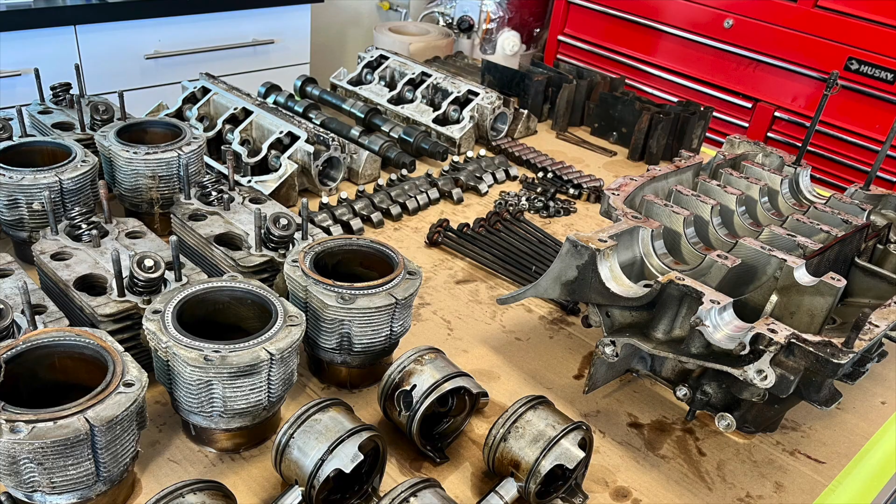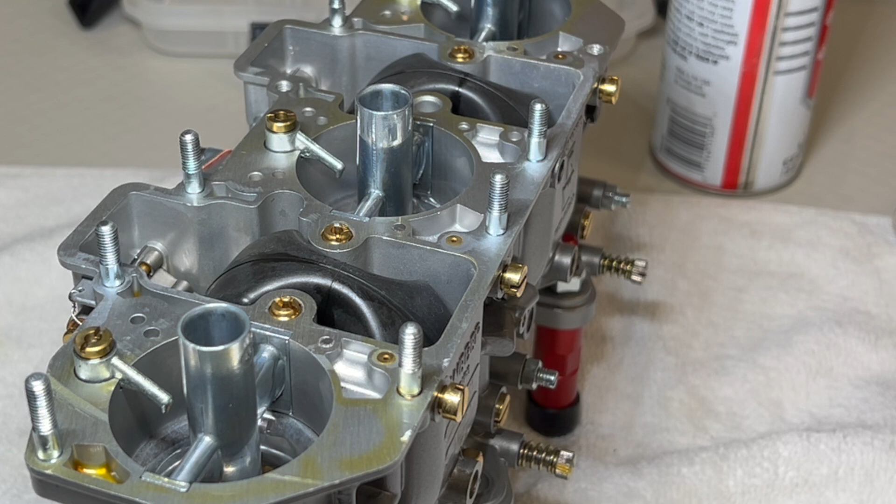So I rebuilt these carburetors and we put them on the car back in May. It's now the 1st of December, and last week I just couldn't get the car started. I cranked this thing for over an hour, trying different things with fuel adjustments and timing. I thought, what the heck is wrong with this thing, because the last time I drove it, it ran fine. I shut it off and didn't get a chance to drive the car for literally about 4 weeks.

I know you can have some evaporation problems with the fuel in the float bowls, which could be an issue, so I thought maybe that was it. Anyhow, no fuel delivery problems, no fuel pressure problems. Just couldn't get the car started.

Eventually I did, fouling the plugs along the way because it had been sitting so long, just cranking it and giving it gas, trying to get things started. But we got it running and it just ran terrible. I couldn't even get it out of second gear. It would idle, I could get it up to maybe 1,500 RPMs. After that it would just start bucking and carrying on, and I tried everything. I couldn't get it to work.

So I thought, well, maybe there's some blockage in the passageways. Maybe our air correctors here are blocked. I mean, it could be anything. But it definitely merits taking the carburetors off and having a look.

So here's what I found. These floats here were switched out. I had originally the brass floats in there, and they're probably very good, depending on the source of where you get them. These I ordered from Italy, thinking, well, they're going to be a lot better coming directly from those guys rather than who knows where they're manufactured. But anyhow, here's what I got.

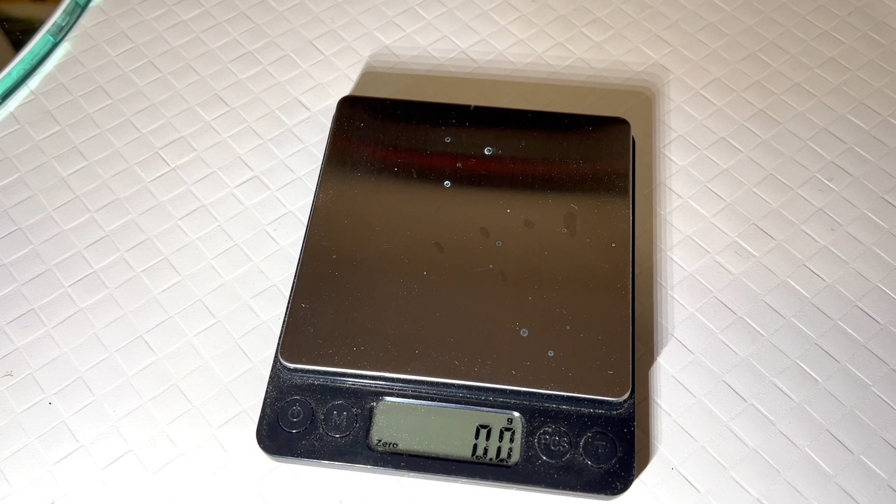Okay, so I pulled the most offensive float out first while it was still soaked in gasoline. We'll just do a comparison here between an original float, 25.3, and this one here just feels heavier.

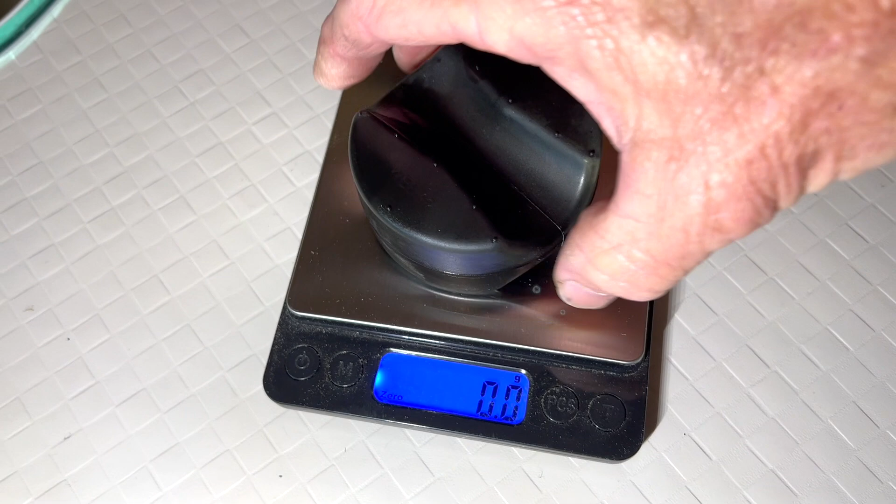But this thing's so fat and absorbed with fuel, it's actually way heavier. So that's going to throw things off considerably by itself, even if it wasn't frozen.

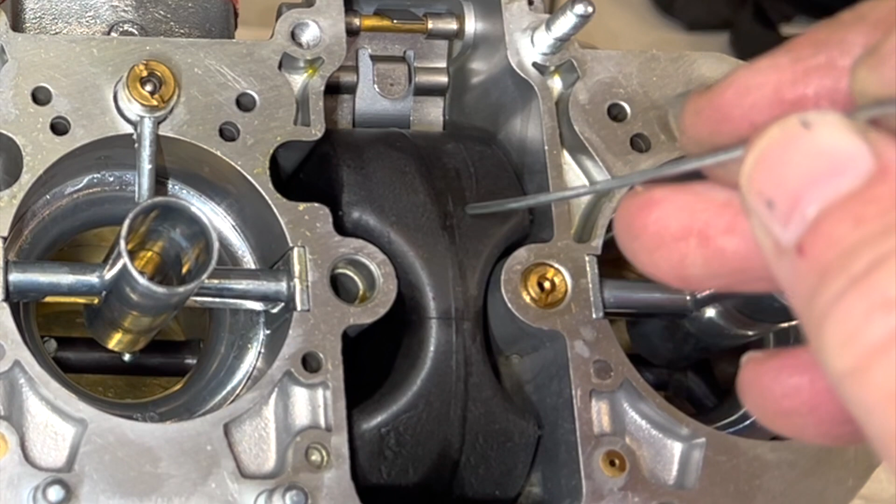And one other quick comparison I want to show you between the two styles. This one, I just don't remember it being this thick when I put them in. I looked at it when I pulled the top off and thought, wow, that doesn't even look like the same floats I put in there. But I just slid back in a brass float, and you can see how much clearance we have. This is fully bottomed out around this area here and here, and in the front as it's sitting on the bottom.

Got quite a shim stack there, going all the way down. This one here, sitting on the bottom, we're already resting up against the housing here, which is not good. I'm actually touching the body, so these aren't going to go down very far at all. That's it, that's all the farther down those go.

But there is the difference after a few months sitting in fuel. Same thing found in our second carburetor. I've got this one pulled apart, gone through, and readjusted everything, put back together, and ready to move on.

Our pile of floats over here all weigh in at about 26.8 to 9 grams, splitting on the pivot points here. Way too thick and definitely not going to work out.

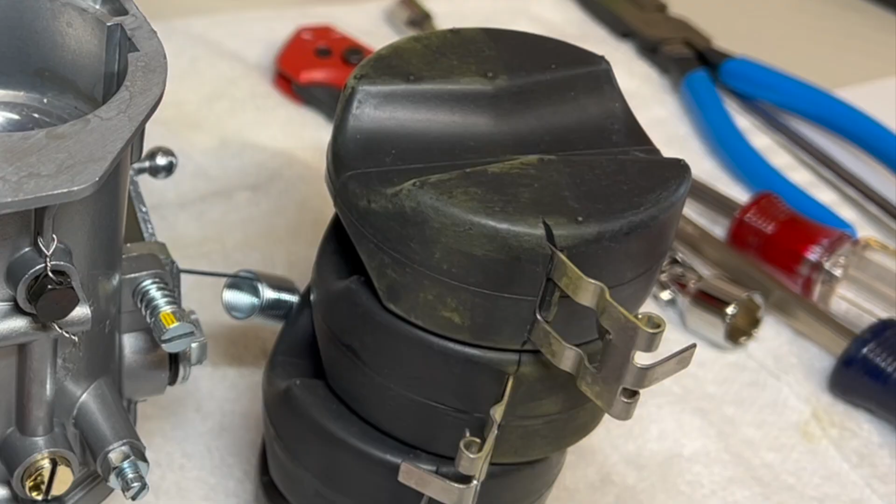So the vendor on eBay, I did contact him, let him know what was going on, and apparently these were ethanol compatible according to the advertisement he was running. But I showed him the pictures, told him what was going on, and his reply basically was it's the first time he's heard anything like this in the 14 years he's been selling Weber parts. So not going to get much help out of him.

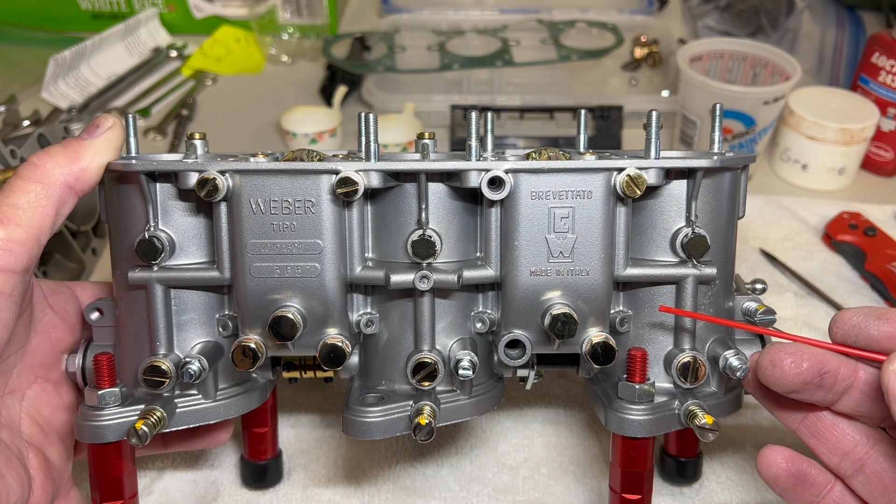And then the other thing I did while I had the carburetors apart and on the bench is I opened up all the progression and idle circuits and ran some tools down inside there, flashlight, carburetor cleaner, compressed air. Just made sure there's no blockage or anything in there that could possibly be hanging up, and everything checked out, was clear, but we did verify that also.

And then another thing I did is I ran a pin set through all our jets, all our orifices, and made sure everything was the correct size and correct jetting and balanced to each other, and we checked out okay there. So mainly the problem here with this carburetor issue is just going to be the floats, the splitting and swelling that goes with them.

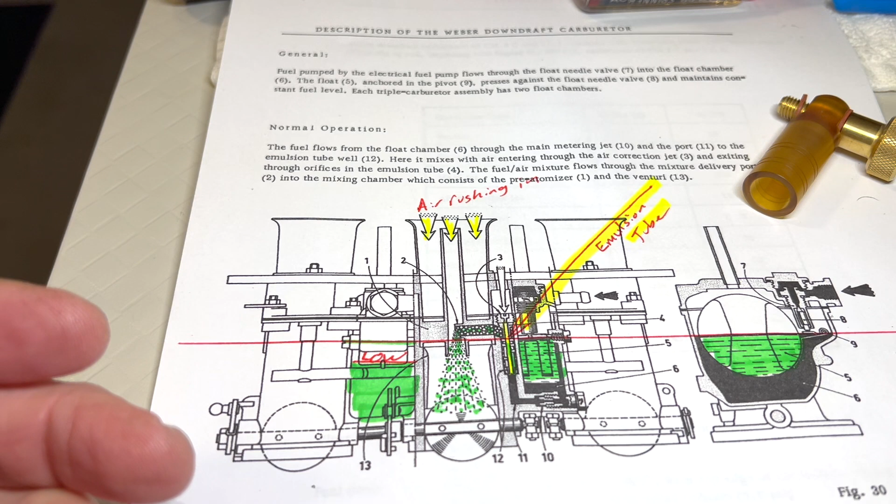Okay, so I've got a printout here from the manual that I've done some highlighting on. And I thought what I'd try to do is, for you guys who don't really understand float geometry and how it affects the drivability of the car, this might help a little bit if I can explain it correctly.

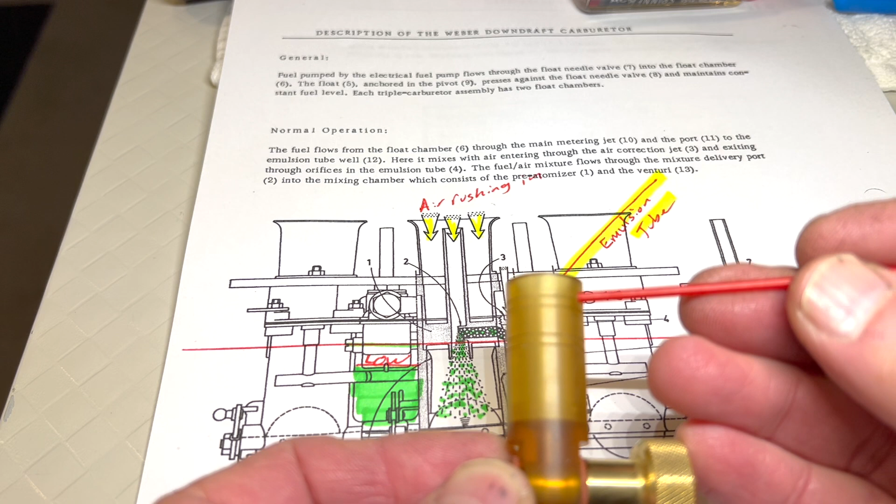So we have the float gauge, which has two sets of lines on it. From what I gather, this lower set of lines is for the float level of the Zenith carburetors, and this top set of lines, the top two up here, are for the Webers. So if we're aiming to be in here, and we end up somewhere in the middle, or somewhere over the top here, it's going to upset the geometry of our floats. And we have a total of 4 floats. Let's take a look and see exactly what would happen if that was the case.

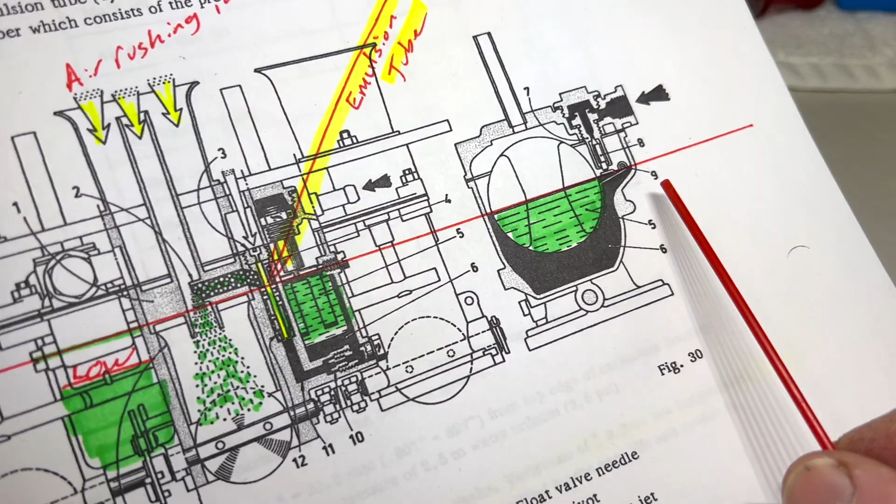Okay, so let's assume in a perfect world, our float geometry is exactly right on the money. So here is our fuel level, here is our float geometry with our needle and seat, and our distance, everything set here at 18 millimeters. So this means if our needle and seat shuts off the fuel, it will balance off at this specific level, which is the 2 lines at the top of the float gauge.

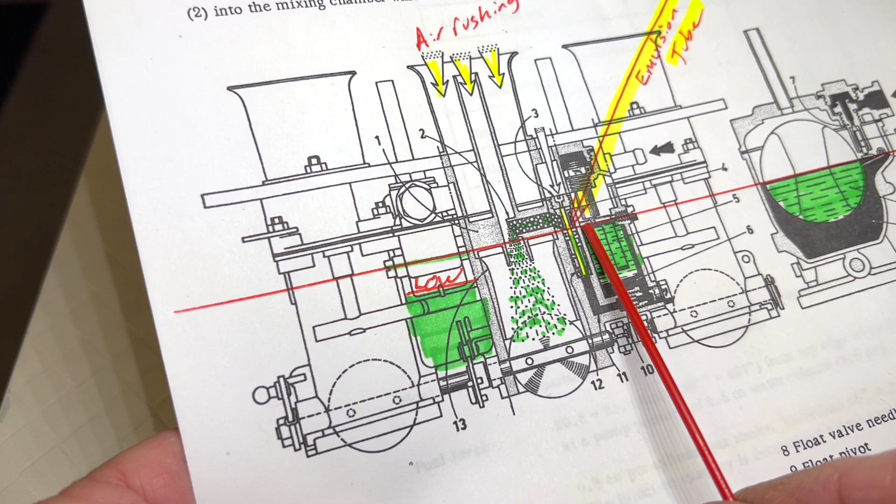And as we carry this across the 3 different chambers, you've got 2 float bowls. You've got one here, alright, so that's our level. And then right next to it, you have the emulsion tube well that draws fuel from the bowl. Those 2 levels are going to be the same - whatever this fuel content is, you're going to have the same content in your emulsion tube well.

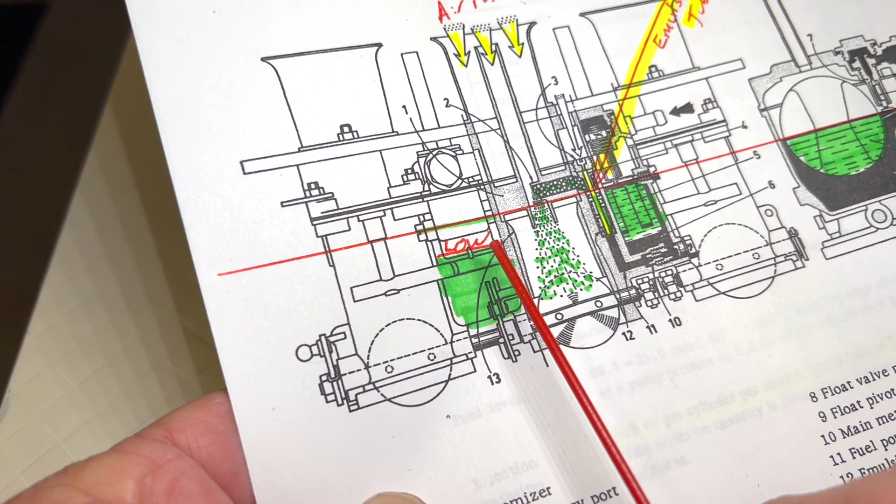If we come over to this float, and let's just say in exaggeration we're way off, okay, so then your emulsion tube level on this side is going to be down here, lower than this one over here. And why would that be a problem? So what happens is you start your car, you're on your idle circuit, and you're drawing fuel basically only from the first progression hole at the bottom of your throttle plates.

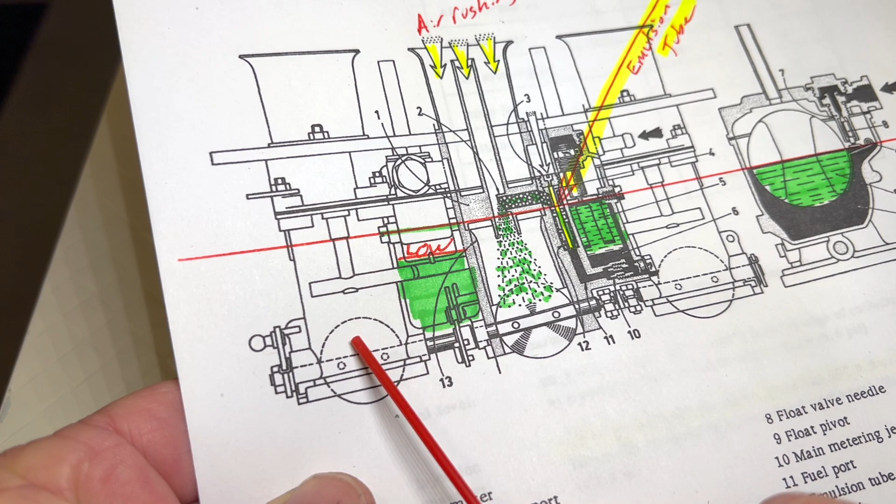As you start to open up the butterflies, you start to draw progression through the top two progression holes, and that sucks more fuel in. That's starting to make like a transition. That helps pick up the speed of the engine, and also as you're pressing on the gas, you are injecting fuel down here to pick up any slack that might be happening during this transition.

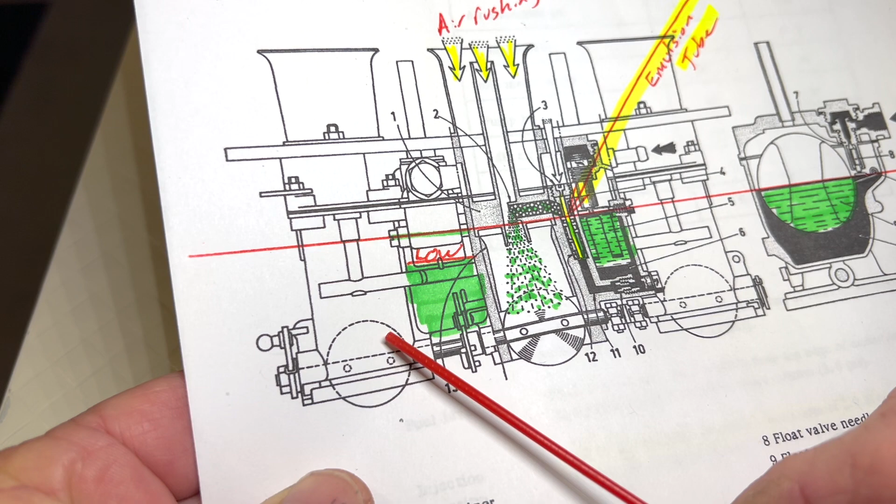So then you're going to open these throttles even farther, and eventually that's going to cut off the vacuum that's pulling the fuel out of your first progression hole and your second progression holes, and then they're just going to stop functioning. Your idle or your accelerator pump nozzles will be pretty much discharged by that point.

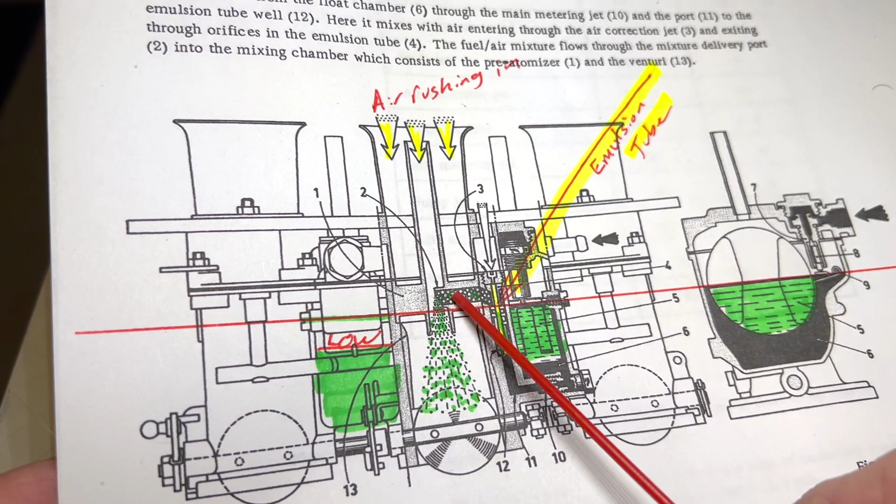So you're not going to get any additional fuel out of your idle circuit or accelerator pump. So then that means that the vacuum being rushed in by this air coming down your cylinders, it's the vacuum that siphons out from your fuel bowl, up your emulsion tube, comes into your pre-atomizer, and is sucked into the engine. It's this transition here which is what makes your car run really good.

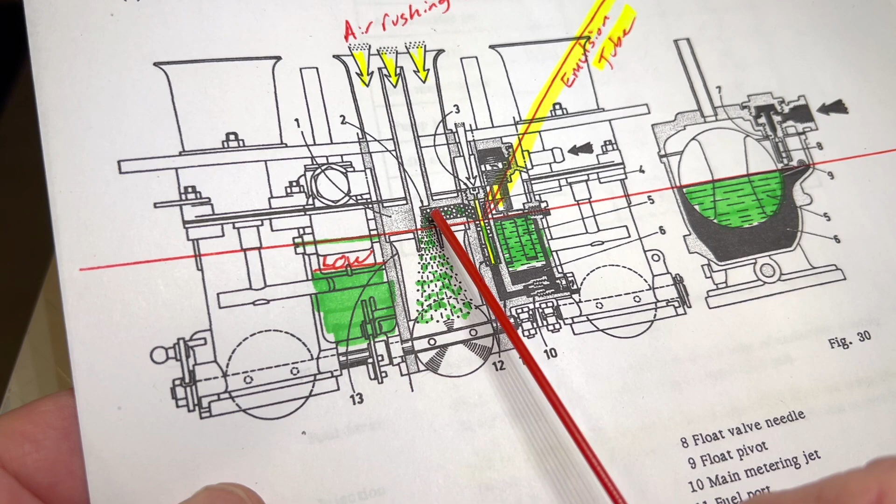If your float level is too low, then it will take longer for this transition to take place. So you'll have a flat spot or hesitation because it's just taking too much vacuum coming in here to pull the fuel through.

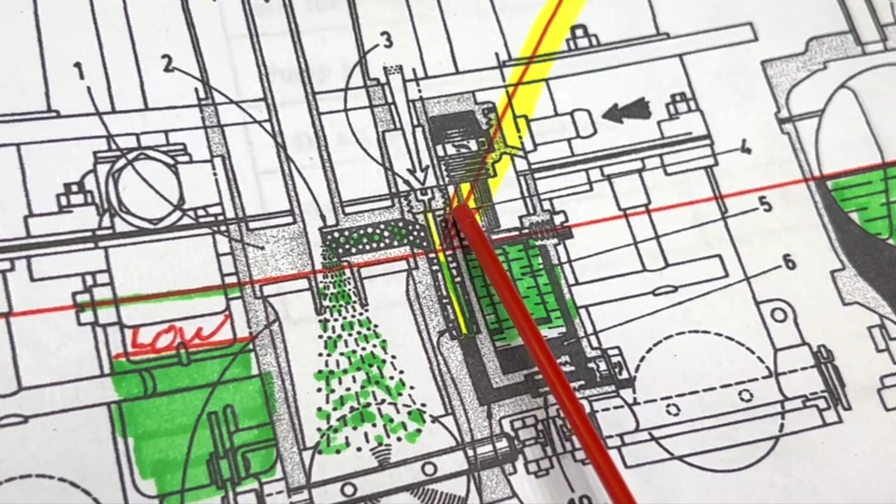If your float is at the right level, when the right amount of vacuum takes place, it's going to be siphoning the fuel off the top of your emulsion tube. And these emulsion tubes have holes in them. You've got an air corrector, everything. All the geometry's already been predetermined.

So if you've got a hole near the top here, and this is set up correctly, and your floats are setting correctly, the second you have the right amount of vacuum, and you no longer are running on your progression circuit down below, you're going to run on your main circuit here, which is drawing fuel from the well of your emulsion tube, pre-atomizing, and going down in.

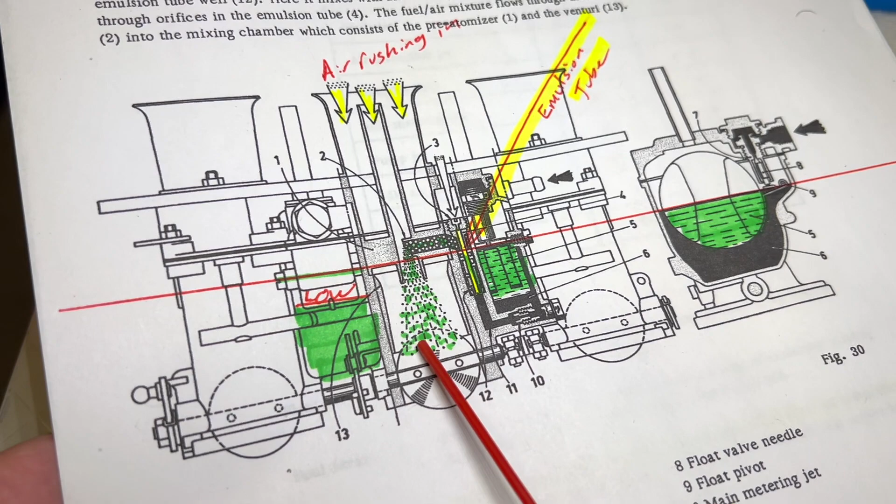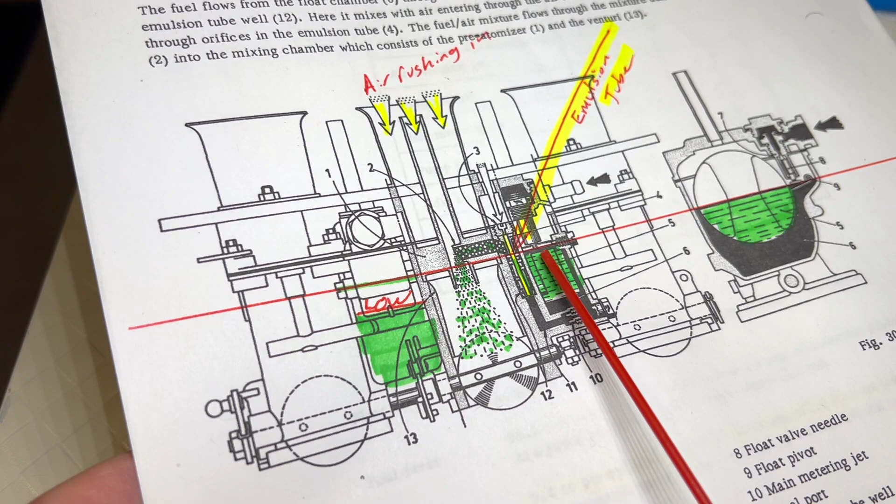If this one is lower or higher than this one in relation to it, then the timing is going to be off. You're going to have fuel coming out of this one, and you're not going to have any fuel coming out of this one. So you're going to have two of them running at the same time, and one of them is going to run independent of the other two, because one float bowl takes care of two emulsion tubes, and one float bowl only takes care of one on each side.

So you have a total of four floats. If these guys aren't in sequence with each other on both sides of the engine, then your timing is going to be off. You're going to be hitting and missing on some cylinders, and that's why you're going to have a problem with performance and drivability if your floats aren't correct.

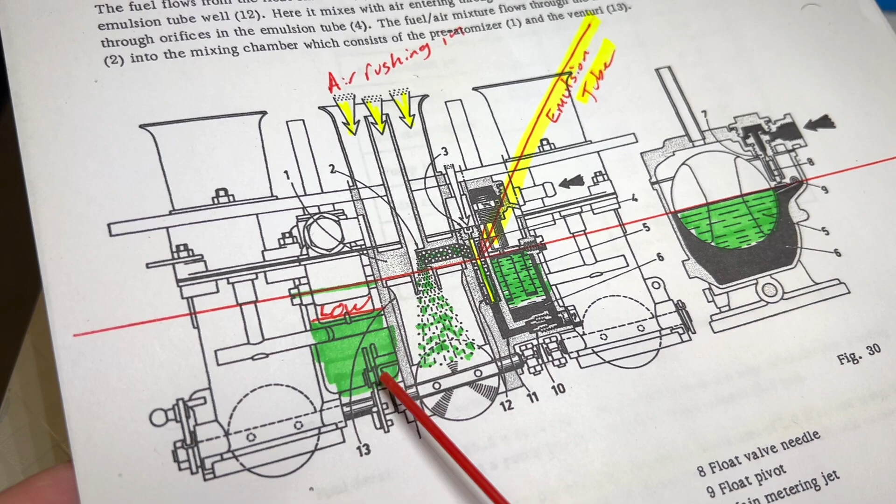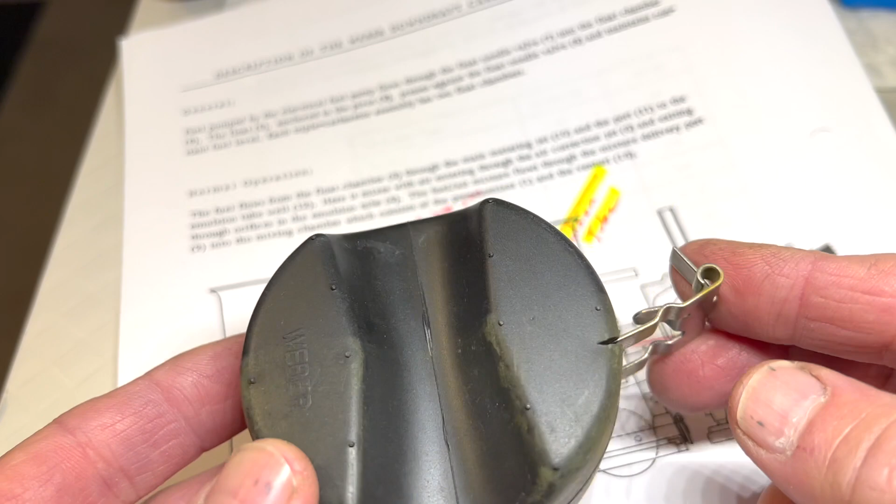So it's really important to get the right weight, the right geometry, to get everything just right on those floats. And if your floats are swelling, like these ones here, that's changing the float volume. They're getting heavy, and it's changing the way the float rises and falls in your float bowl. This has to stay constant, so we can't have too much fluctuation in here to keep running and good performance.

Okay, so that's pretty much how the floats work and why it's important to have everything in perfect symmetry with each other and good geometry on your float levels.